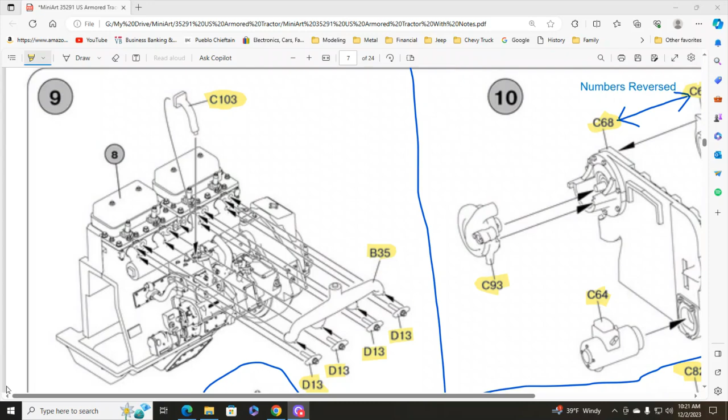Okay, get my necessary tweezers and some glue out here. Hopefully I've got everything cleaned up to where I don't have to do any more cleaning on camera. Luckily I haven't lost any of these parts yet.

Okay, we need to put this pipe on first, and it'll go from the top of the pony motor to the cylinder head, like that. Take just a bare minimum of glue to keep that in place.

Okay, looks good. And this is the exhaust manifold. It'll go here. I can put a little glue like so. I want to use such a small amount of glue.

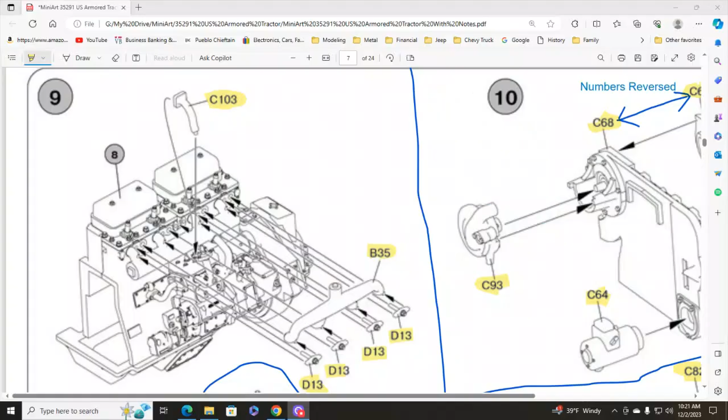Let's go over here. Okay, here's 10. Now they reverse the numbers on these - this should be C69, this should be 68, so they're right next to each other. It's not that big a deal, but they are switched on the instructions here. Then we've got C64, C93, and C92. There is going to be a seam around here that I might want to do a little work on before I actually put the rest of the pieces on this.

So let's take a look here before I forget. Let's get these a little closer. Okay, there's a picture. These are going to go together. Yeah, there's going to be a little bit of a seam that I might want to clean up.

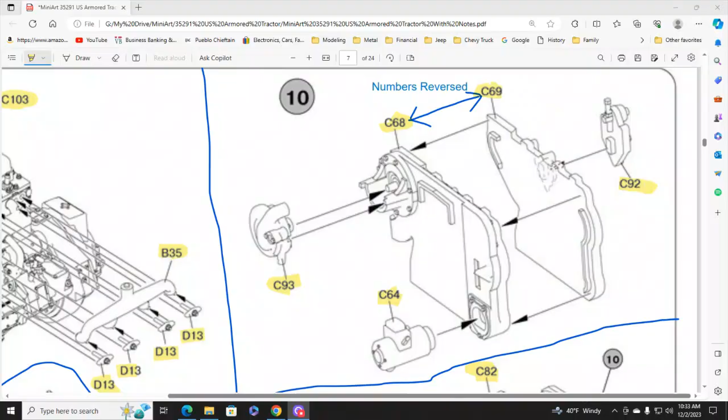There's step 11 there, and I can't get it all on. There we go, we got a number of pieces here. Okay, I'm back, just had a little interruption, no big deal. Here's step 11. We've got 1, 2, 3, 4, 5, 6, 7, 8, 9, 10, 11, 12 pieces in this one little step. So let's go here.

Here's all of our parts. And I already took a picture. I'll put it up over here. There's the parts we need for that.

Okay, the first thing I want to do is put these two and these two together, because I'm going to have a seam. I want to make sure that seam is nice and clean before I move on. Let's see here, I'm not sure. This will go this way, and this will go this way. Okay, just like so, the seam won't be too bad. Looks pretty good.

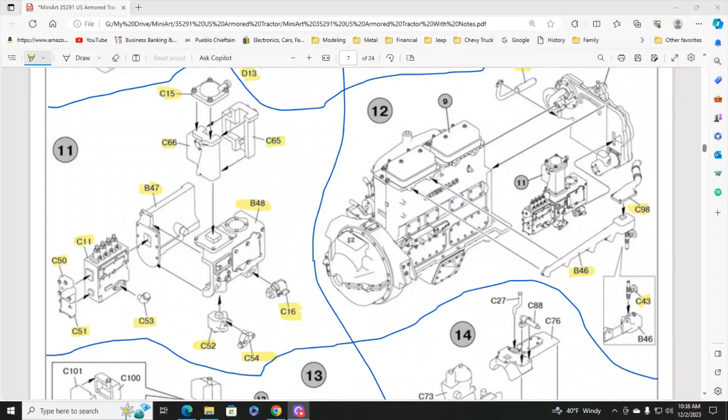Okay, the furnace is running, oh well, let's go ahead and finish. Let's go back here real quick - this is step 10 that I need to finish up. I've put the C68 and 69 together, and I've got the seams cleaned up reasonably well. There's just a little bit in there, I'm not sure if it'll be seen or not. Let's continue - here's the rest of the pieces. Yeah, I think it looks pretty good.

Let's see here, C64. There's my tweezers. It's right here. And it'll go down here, and that's got a flat side on it to key it.

Okay, and then over here we have C93. Should be here, I can get a hold of it. It looks like a water pump or something. It'll go here, and it's got a couple of locating pins here and here. There, like that.

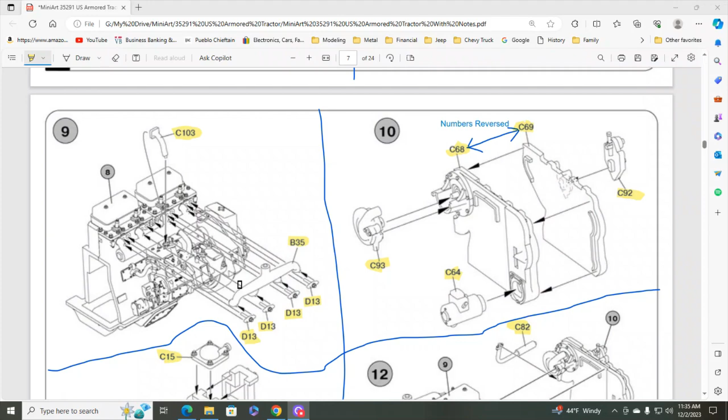Get everything to line up like I want it. Okay, that should finish step 10. So let's go ahead and take a look. We've finished 9, we've finished 10, we've finished 11, and I did clean up the seams on this a little bit more. So let's go on and look at 12.

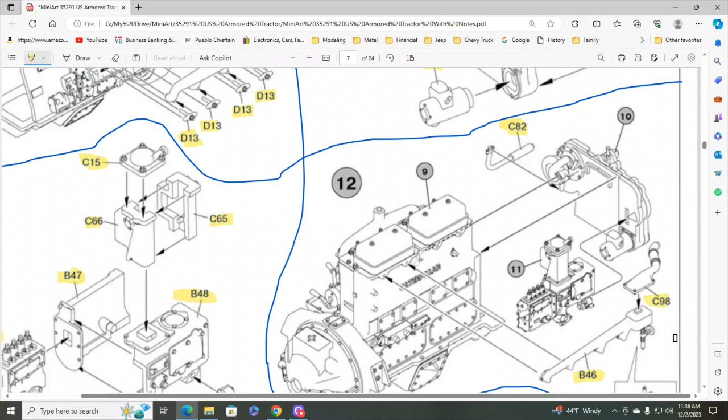Okay, let's see if I can - 12 is using the parts that we've already made up here. I've got this little bitty piece here that we have to add to the underside of B46. So let's do that, and we'll add C98, and then it'll just be a matter of putting these large pieces on.

Here's our pieces. Before I forget, I'll take a picture, and I'll put it up kind of over here somewhere. So let's see here what we need to do - it's on the bottom of this.

Gotta add this part. Boy, those are getting to be some tiny little pieces. Try not to flood it with glue.